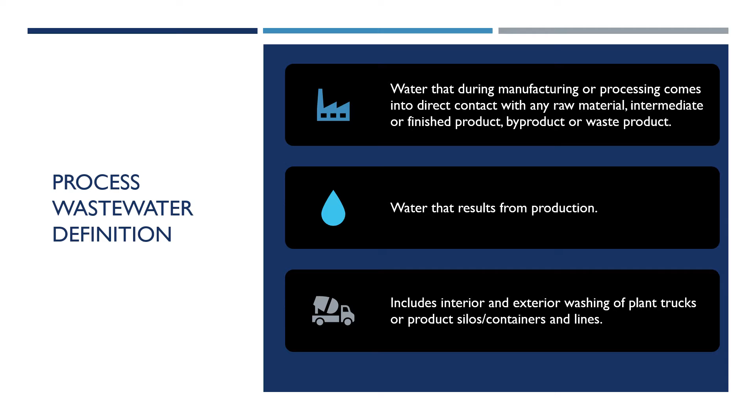A large amount of different kinds of processes use a lot of water and in turn create large amounts of wastewater. In food manufacturing, for example, dairy, meat, alcohol, sugar, and animal feed manufacturing processes are major wastewater producers. In sugar manufacturing, a cleaning process of sugar beets uses large amounts of water as dirt is washed away.

Water can also be a byproduct of a process. In the dairy industry, an evaporation process is used to manufacture milk powder by evaporating water from milk. And I'm going to be using food manufacturing as an example in this presentation as my background is in food processing and biotechnology. Also, the food industry has much room for improvement regarding wastewater and its handling.

Other industries that have processes that are creating large amounts of wastewater are textile, fertilizer, and mining industries, for example. These processes can produce wastewater from which valuable resources such as heavy metals can be recovered.

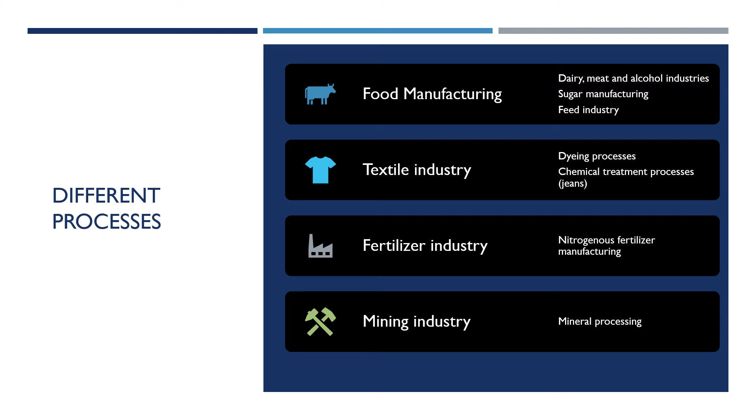Where are you going to treat process wastewater that has been created? Number one, you can send it to a wastewater treatment plant, or number two, you can design a wastewater treatment process within your own plant and recycle your own wastewater, which reduces your wastewater output. I believe recycling wastewater within plant processes is the future, at least in food manufacturing, where a lot of wastewater is created every single day. So I'm going to be focusing more on that in this presentation.

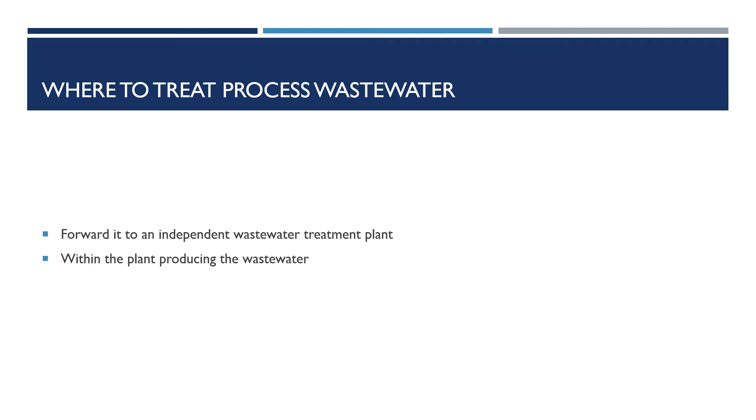How to choose the best way to treat industrial wastewater. You will need to consider the quality of your source water as well as the quality you want after the wastewater has been processed. Different processes, products, and equipment require different quality of water. Testing and treatability studies are a critical step in identifying appropriate treatment methods.

Plant lifespan. How long are you going to use this system? Choosing stainless steel can be expensive over PVC, but in the long run, you'll make up for it by saving on maintenance and replacement costs. And then there are some regulatory requirements. Check out the relevant safety and discharge guidelines to make sure you are complying with them.

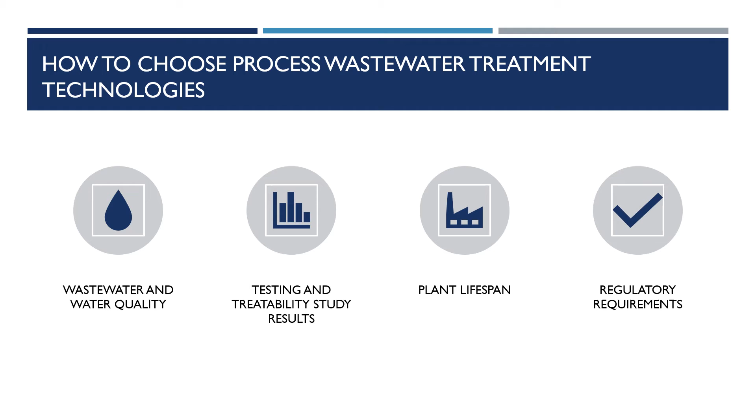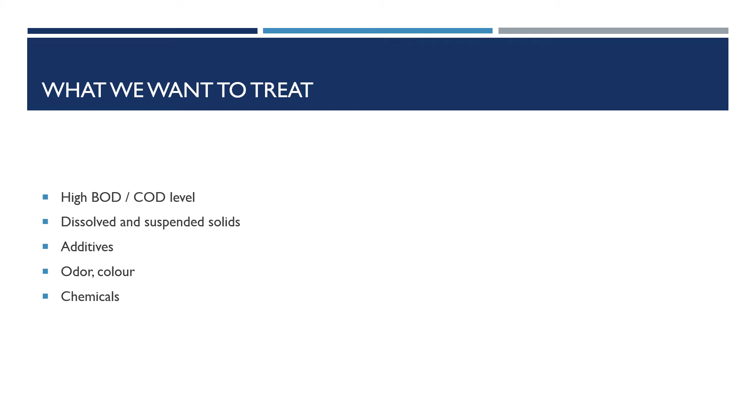There are some characteristics in wastewater that you want to treat, such as high BOD and COD level, dissolved and suspended solids, additives, odor and color, chemicals, for example from washing product lines. And these are especially problems with wastewater from dairy product manufacturing.

As you already know, process and other wastewater treatment methods depend a lot on what wastewater consists of and how clean we want it. You can use one treatment method or more as a combination as long as it is efficient. You can use different chemical and physical treatment processes that have been chosen specifically for your own wastewater. In chemical treatment processes, there are precipitation, coagulation, and flocculation, different electrochemical and oxidation processes, as well as adsorption processes. In physical treatment processes, there are flotation, sedimentation, and different filtration methods, for example.

And then there is biological wastewater treatment. It might not be suited within the plant itself to process wastewater, as it is sensitive to react badly when conditions change drastically. For example, if a large amount of milk gets in the process, it messes with the microbes in it and causes some trouble with its high amounts of COD. Also, some disinfectants can kill the microbes if they end up in the process somehow.

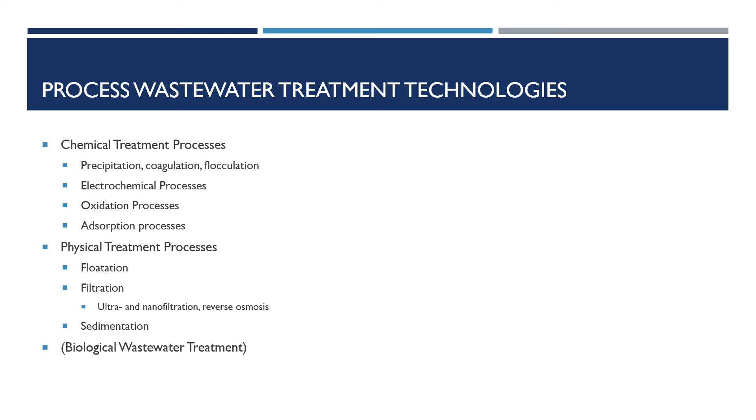And here are some combinations I would consider using in treating dairy plant wastewater. You need to remember that wastewater quality can also vary within the plant itself, as there are a lot of different processes. Oxidation, electrochemical processes, and adsorption are used to break down or get rid of particles and get rid of unwanted features, and they are all paired with a filtration method, as filters are designed to remove bigger particles from within the wastewater.

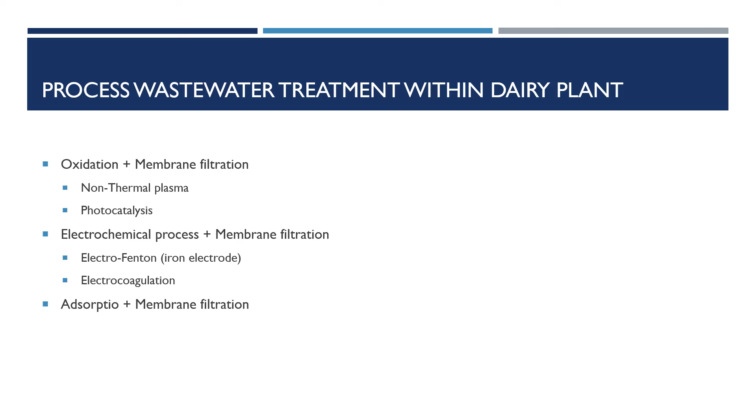Now let's talk about bottlenecks regarding process wastewater, economics and value chain. Processes might be too costly, so it might not even be economically reasonable to clean process wastewater. And when it comes to recovering resources, small amounts and low quality resources are not profitable to recover. There needs to be a market for the resource you are going to provide, so you need to know it, as well as the competition you are going to have.

And in order to sell the resource, you need to know what it can be utilized for. And you can also be innovative with it as long as there is a market for it. Is it still profitable after transport? Sometimes distribution costs are too high.

And then there are some bottlenecks regarding environment and health. Some process wastewater and certain treatment processes can react badly and cause health risks and unnecessary emissions. And in society and policy, not everything is accepted by society, and you also need to find out what kind of policies there are regarding your process wastewater and its handling. Some policies regulate the use of certain wastewaters in different kinds of processes.

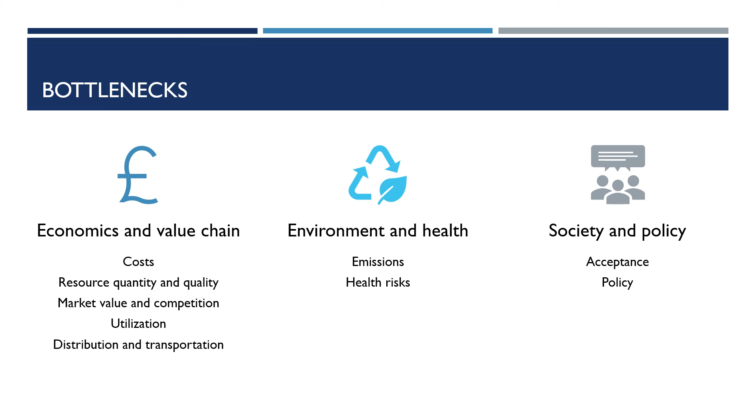So, what can we do to reduce process wastewater generation? One, we could recycle wastewater within factories and/or processes. This might need some sort of wastewater treatment process depending on wastewater quality. If wastewater was recycled within processes, less wastewater would be leaving the plant and the amount of clean municipal water taken in would be reduced.

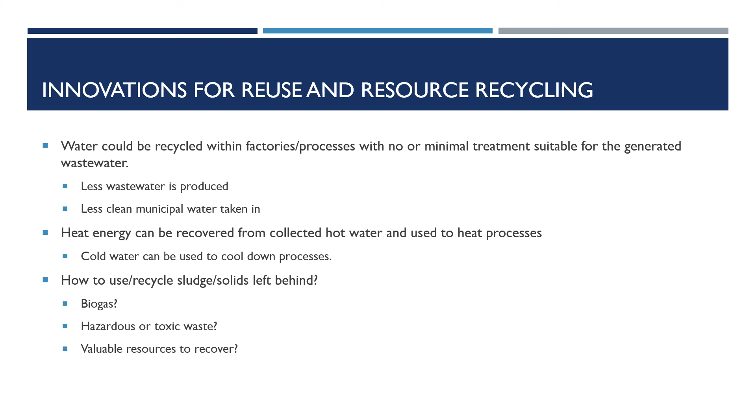Number two, hot water can be used to heat up processes, and in turn cold water can be used to cool down processes. Three, how would we dispose of or recycle possible sludge left behind? Depending on what it consists of, it could be used to produce biogas. This might be possible to do from sludge left behind from dairy plant wastewater treatment. And also you need to consider if the waste left behind is hazardous or toxic, because it requires different kinds of disposal methods.

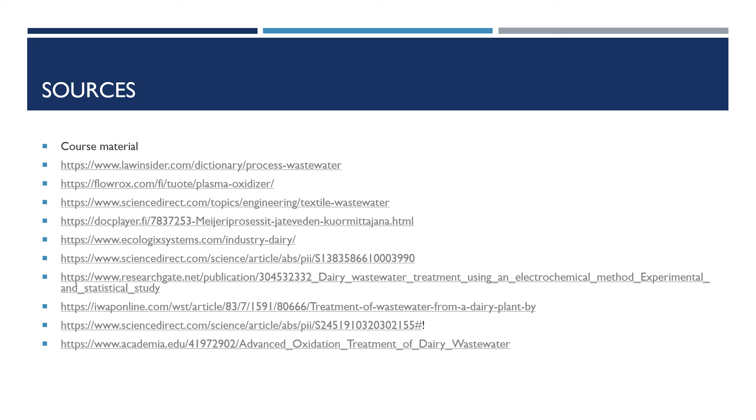And here are the sources I used in this presentation if you want to check them out. I used the course material of course, as well as some information I found on the internet. I also have some experience in process wastewater, as I have worked in food manufacturing for a few years now with it.